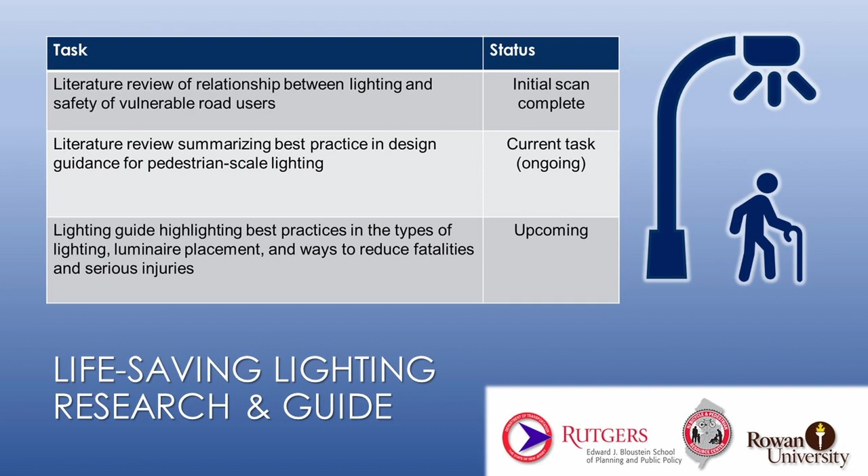We have one more initiative on nighttime visibility. This has been going on for some time, but we're making progress. We have an NJDOT task order to upgrade our traffic signal pole and mast arm details based on 2015 AASHTO standards. The department wants to install backplates with retroreflective tape on traffic signal indications. Our goal is to install backplates on all signal heads, on all steel mast arms, going forward on new construction.

Right now we do it wherever possible on the steel mast arms, but we've made progress. The first draft for steel traffic signal poles with mast arms less than 25 feet has been reviewed and comments provided to the designer. In the future, once the details are complete, NJDOT will require installation of backplates on all signal indications. So that's what I have on this.

But does anybody have any questions about the two initiatives? Go ahead. Most of us get constituent inquiries about things like this, so we're still in the study phase, so we haven't yet determined — do we know when we expect that to be wrapped up?

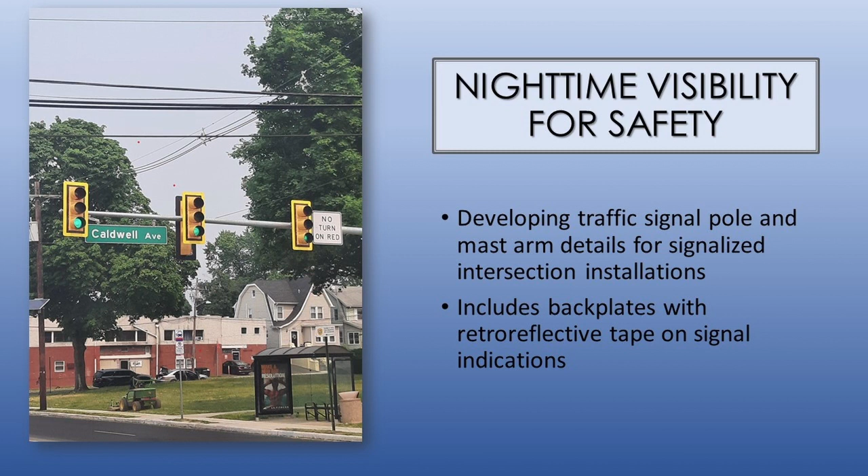So we have 3 pilot projects going on right now in DPM to figure out what it takes for the department to install backplates—whether we have to revise the whole intersection, how costly it is, and where we're gonna go with that. We don't have a program yet, but we have 3 pilot projects and we're gonna see where it takes us.

Yes, Andy? I'm just curious—this is great for what DOT's doing, but is this being extended to the local systems through the grants and local aid? Backplates? Yeah, we encourage backplates on all of our projects. When we get involved as an SMA, one of our comments is always, can we install backplates here?

The locals, we promote it on our HSIP projects when we do application reviews. We feel it's important from a safety perspective, but we understand it's not as easy as people think. You can't just go out there and throw it up. That's why, especially with the new AASHTO standards, it's definitely not as easy as people think.

Or else the department would have done this in 2016 or 2017. It's difficult because it's not just dead load, you've got wind load too. And I think with the new standards, that's what comes into play. You see other states, some of their steel poles are very, very big. Have you ever Googled Florida locations where they have back plates? The new AASHTO standards require deeper foundations and larger diameter poles.

And it is what it is, but we'll continue to do our best at DOT. Any other questions? Okay, thank you, Dan.

Good afternoon everyone, my name is Shivani Patel, and I'll be providing the update on infrastructure preservation innovations. To start with EPIC, since June there has been a lot of activity for this innovation. Special provisions to the NJDOT specifications were drafted for internally cured concrete, and the team members are currently conducting a peer review of the draft provisions.

A candidate list of bridges for internal curing in the bridge deck concrete was compiled. The team is currently working on finalizing the list of candidate bridges with the Division of Project Management.

Team members Samar Rabi and Jess Mendenhall conducted a CPM coordination meeting, which included staff from Project Management, the Program Management Office, Bridge Engineering and Infrastructure Management, Construction and Materials, Regional Construction and Materials, and the Division of Project Management. This meeting introduced the concept of internal curing, addressed questions and concerns, and discussed the implementation plan and next steps.

Team members reached out and communicated with other state agencies for lessons learned and knowledge transfer. The team hopes to continue ongoing communication.

In the next quarter, the team plans to contact and meet with concrete suppliers to gauge readiness for producing internally cured concrete and discuss potential implementation challenges. Team members also plan to begin communications with project designers for the selected projects.

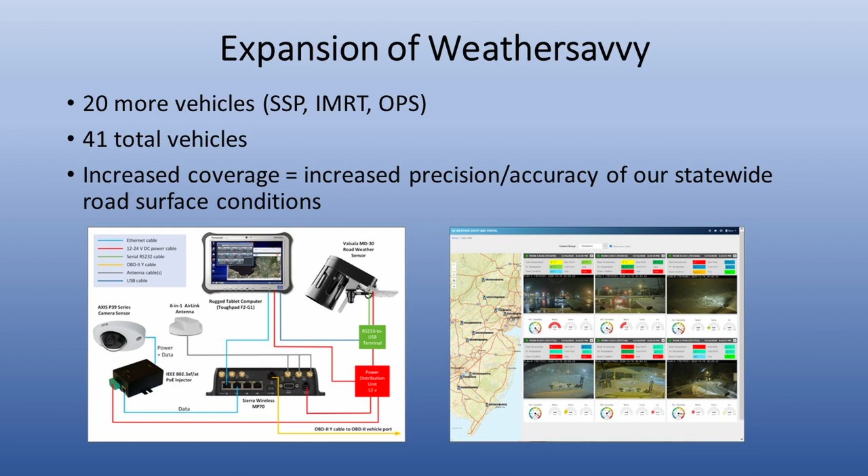Also, we are still in the expansion phase of Weather Savvy. We have a total of 41 vehicles where we're installing Weather Savvy equipment. There is a camera, there is LiDAR, there is a router, and what they do is find out the condition of the roadways, which is very good for the snow. So we are expanding, NJIT is with us. That's what we're doing, so that we have more precision and accuracy for our statewide road surface conditions. That was all from my side.

With the Drivewyze notifications, is it only going to trucks who are currently in the left lane, or is it going to anybody who signed up, every 15 minutes? It is for the truckers, but we really cannot figure out whether they are in the left lane or not. So what's happening is, just for safety reasons, they're getting pings about 4 an hour.

I thought that technology could come where, from the weight of the truck, it can find out whether it's in the left lane or not. But right now what it does is just for safety reasons. And we also observe that if the roadway is not that long, so just from the beginning point, they can send the alert. So we definitely don't want so many alerts going to the truckers because we know they get frustrated. So we're keeping to a bare minimum, like every 15 minutes.

Oh, that's cool. I know that we did a social media post on the TIM training, the online TIM training, to get more people involved, and I believe we are trying to educate our internal comms team about Drivewyze so we can speak about it more educatedly.

And we're encouraging a lot of people to take the online training. Whoever I come across - I used to work for Department of Corrections, I worked there for 13 or 14 years, and I know they are involved in transporting inmates from one prison to another halfway house, so we'll see how it goes. I did reach out to the assistant commissioner there, and I gave her the option that we would be happy to collaborate with them, just so we can get maximum people trained for TIM.

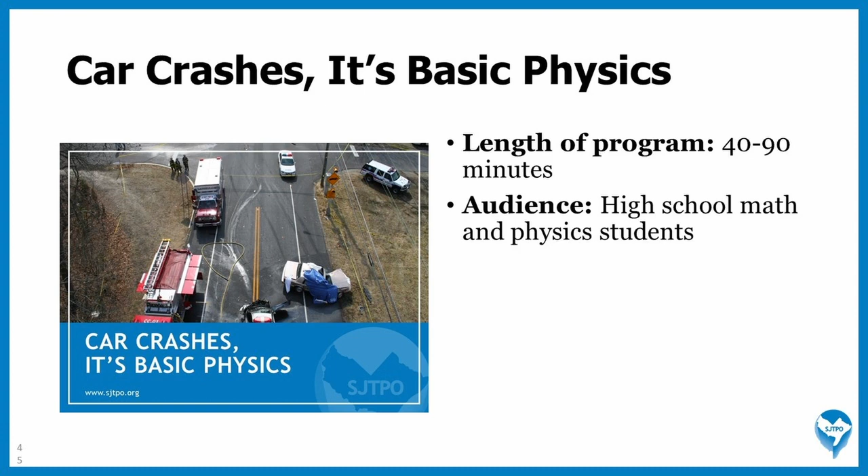I've also taken it now to anatomy, to forensics and anatomy. So we do autopsies. We all know New Jersey's pedestrians, we're pretty high in pedestrians. I worked in Atlantic City, let me tell you, I got a lot of expertise with pedestrians getting hit. I've had pedestrians get hit in wheelchairs, regular, high speed. I've gone to scenes and you actually say, oh my God, there's shoes, the foot's still in there. Okay, let's leave that. When those pedestrians get hit, they don't fare too well. So we do a lot with pedestrians.

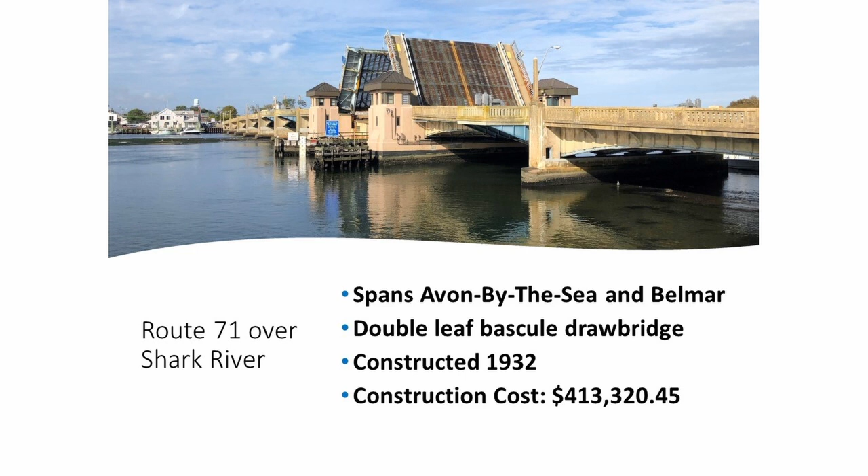So just a little bit of background. That is the bridge right there, Route 71 over the Shark River. It is a double leaf bascule drawbridge. For those that don't know what a leaf is, it's the part of the bridge that raises, so there are 2 on this bridge, the double leaf bridge. It spans the Shark River between Avon by the Sea and Belmar. Constructed in 1932 at a cost of $413,000. It's also our most beautiful bridge, awarded the 1933 Most Beautiful Bridge Award by the American Institute of Steel Construction. It's also historic, listed on the National Register of Historic Places.

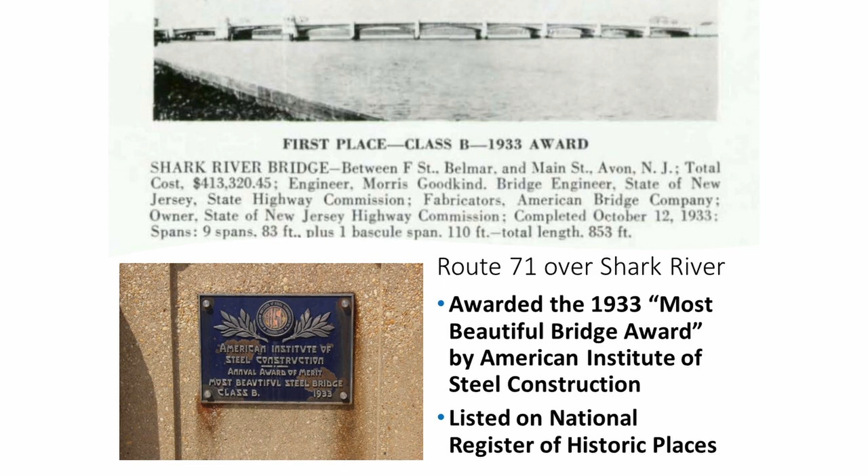It's our busiest drawbridge. It has over 5,000 openings for marine traffic annually. It's one of two DOT drawbridges that staff 24/7. Seasonal vehicular traffic, as you can imagine, down the shore, but year-round, we see heavy pedestrian and bicycle traffic over this bridge.

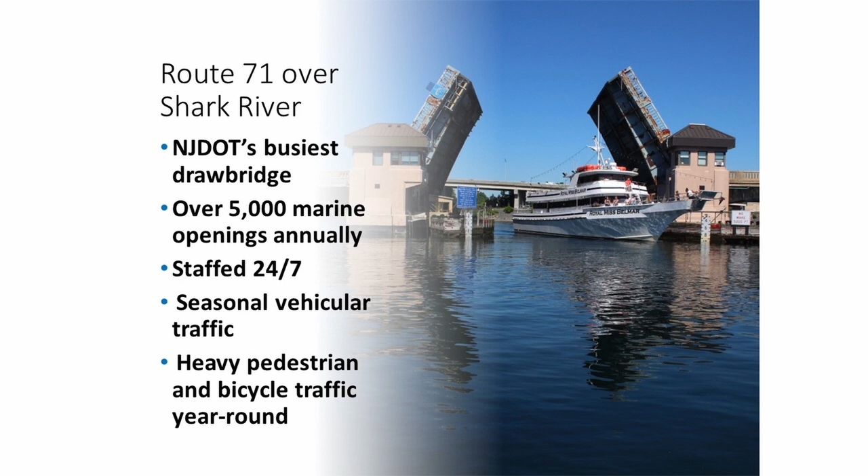So just a little bit of geographic information here. It's the second of 4 bridges from the Atlantic Ocean. We have Ocean Avenue over here, then you get to Route 71, then New Jersey Transit, and then Route 35. So Route 71 offers 13 feet of clearance in the closed position. Ocean Avenue has 15 feet closed, New Jersey Transit is 8 foot closed, and then Route 35 is 50 feet fixed since 2004. So anything going through Route 71 has to be less than 50 feet tall.

Excuse me, could you go back there a second and do that again? Which bridges are which? Ocean Avenue, that's Monmouth County. 71, that's ours. New Jersey Transit, and then Route 35, which is ours, DOTs. I'm just looking at the clearance heights and they're vastly different. They're all over. Route 35 was a twin of 71 until it came down in 2004, so it's 50 foot fixed. Anything going under there has to be less than 50 feet.

Okay, thank you. Just a little bit of background, so you know where we are and what we're talking about. So the safety features, this will get to be important later in the presentation, but it has a myriad of safety features on this bridge to prevent malfunctions: bridge traffic signals, preempted traffic signals at the adjacent intersection, warning gongs, warning gates, barrier gates, and span locks.

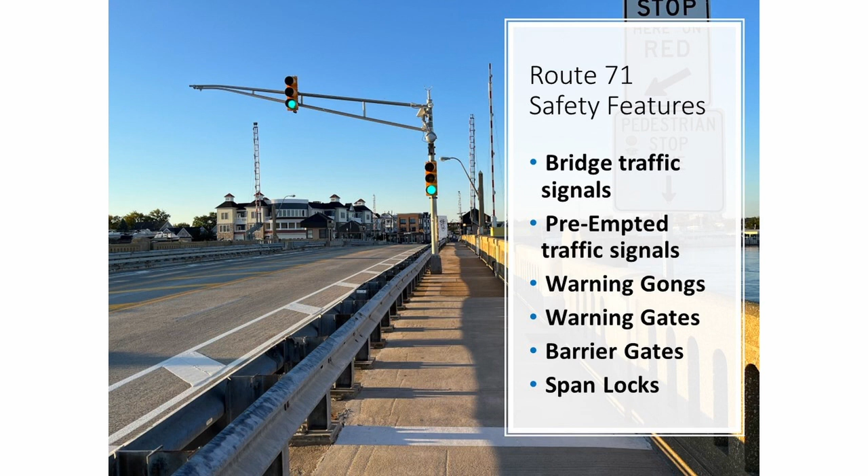So just to go through what each one of them are, the warning gates, they come down just as the light turns red to alert drivers that the bridge is going up. Then the barrier gates, they're those big beefy barrier gates behind the warning gate. They come down, and when they lock into place, they physically prevent a car from going into the open drawbridge. And then the span locks, they're kind of like a deadbolt on your door. When the bridge is in the fully closed position, the span locks will engage, keeping the bridge locked into position, keeping it from bouncing, keeping it from opening unexpectedly. So they all work in unison with each other. We go through testing to make sure that everything's working and everything's working in sequence.

So just to show you where everything is, the green squares are the bridge traffic signals and the warning gongs. The yellow is the warning gates. The red are the barrier gates, which form a physical barrier when the bridge is going up. And then the blue are the span locks. So the span locks are kind of the whole topic of discussion as to why we did what we did out here.

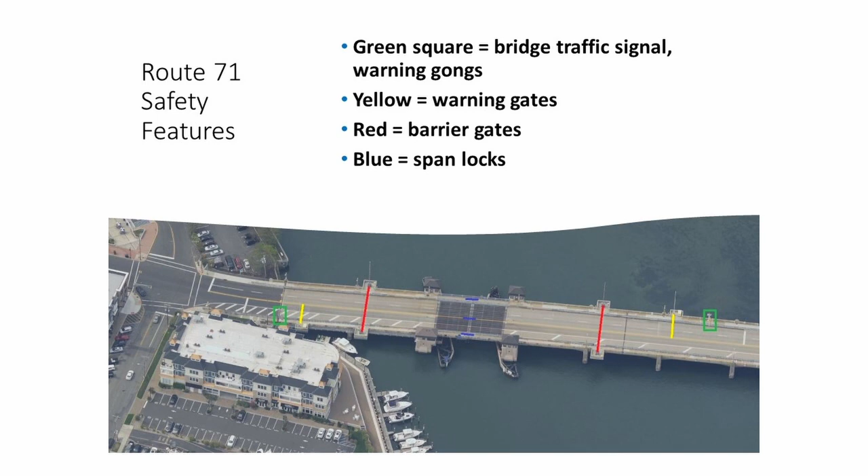So for those that don't know how a drawbridge operates, this is the opening sequence. The Marine call will come into the bridge house via radio or telephone. The operator monitors all his cameras, turns the traffic signals to red when it's safe to do so, when there's no traffic, no pedestrians. That activates the flashing lights and the warning gongs.

Then the operator ensures that all traffic is stopped and clear of the gates, because there's always people running the gates, always pedestrians trying to run the gates. He'll lower the warning gates, then the barrier gates. The oncoming gates come down first, then the offgoing come down second.

Then the span locks are disengaged. Then there's an air horn on the bridge, sounded 2 long blasts, and then the bridge is raised. And then when the boat is safely through the bridge, we do it all in reverse.

The vessel captain notifies the bridge house that the vessel is clear of the bridge. The operator ensures that marine traffic is clear of the bridge. Then that same horn is sounded 5 short blasts. The bridge goes down, the span locks are engaged, the barrier gates are raised in the opposite direction, offgoing first, then the oncoming gates. The warning gates go up, the operator turns the traffic signals to green, and then he gets in his house and just hides as everybody goes for a big free-for-all.

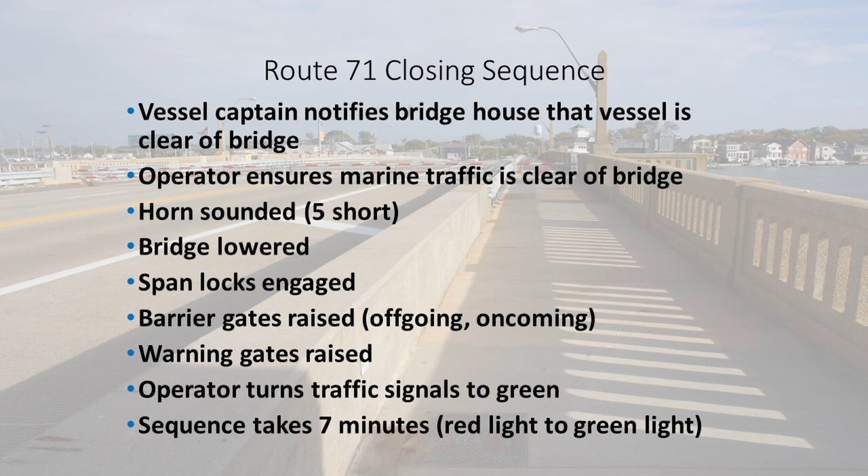It takes 7 minutes from red light to green light. So as soon as that light turns red for the call, if you're the first car there, it's 7 minutes from red light until that light turns green again.

So September 22nd, 2021, we had a failure of one of our span locks. Like I mentioned earlier, we have 3 span locks for safe operation of the bridge. The center span lock failed during the 3rd lift of the morning. Weather conditions were the same as today, partly cloudy, 70 degrees. There was no adverse weather conditions, and we had no previous significant events with the span locks.

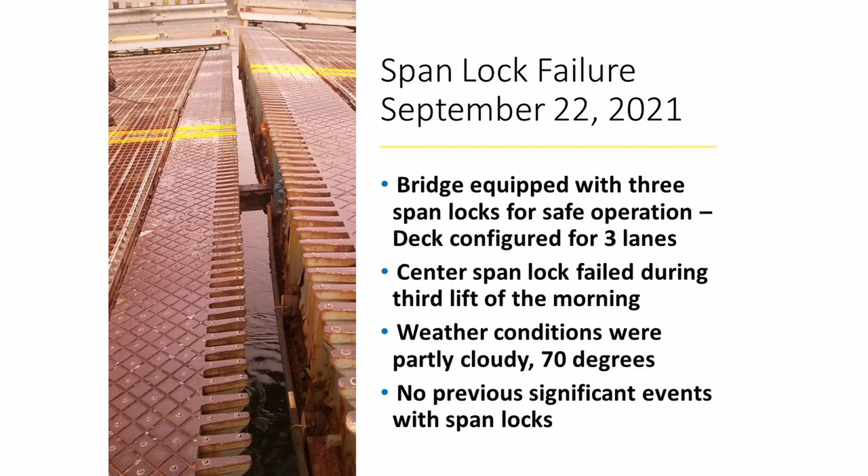So what had happened was when the bridge was raised, that center span lock, like a deadbolt on your door, just engaged itself. There were no indications that anything was wrong in the operator's booth, and the operator initiated his closing sequence as usual, not knowing anything was wrong. So as the bridge was coming down, you can see the span lock was engaged. The two leaves kind of crashed into each other, and the span lock hit the other leaf and damaged the structural steel. So the bridge had wedged itself shut.

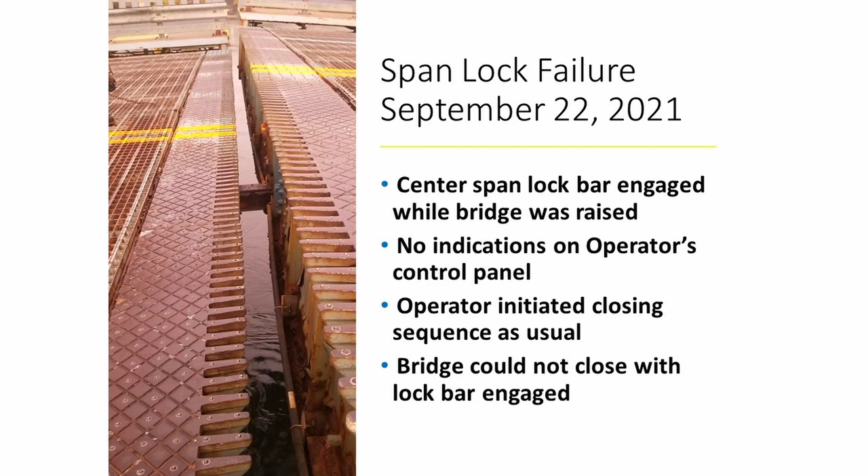We couldn't get it open. We couldn't get it closed.

Just some more pictures of the damage out there. The lock bar was extended on the far side, and then you can see the damage where they hit the steel and the receiver socket.

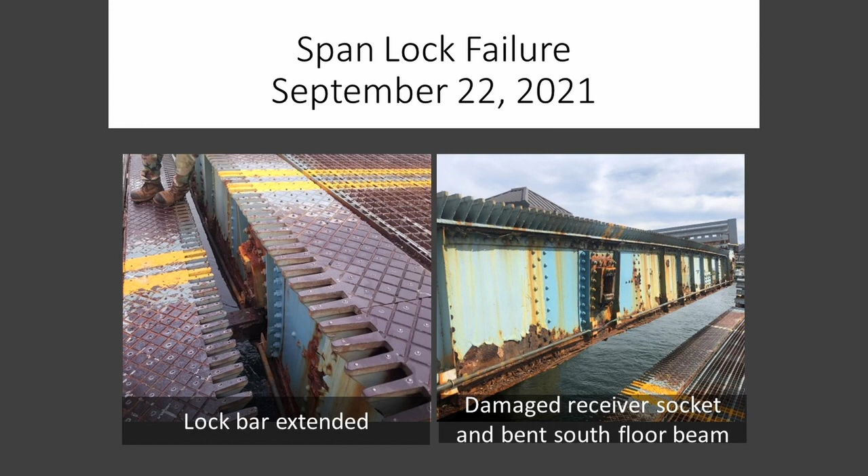So even if we did get this back into position, there was no way that we could reuse any of the existing machinery. Some damage from the underside, some of the bent steel, and then you can see in this picture just some of the damage.

We also had 2 boats out at sea that had to be notified the bridge was inoperable and they couldn't come back in until we had it fixed. And then we sent out our movable bridge engineering team and our WSP consultant out to the site.

So in response, our on-call contractor was on the scene, and we immediately determined that the center span lock was just not reusable. That hardware was cut out so we could lower the bridge. And then we were able to bypass all the electric feeding that span lock, and that allowed us to at least raise the bridge to remove all the damaged components.

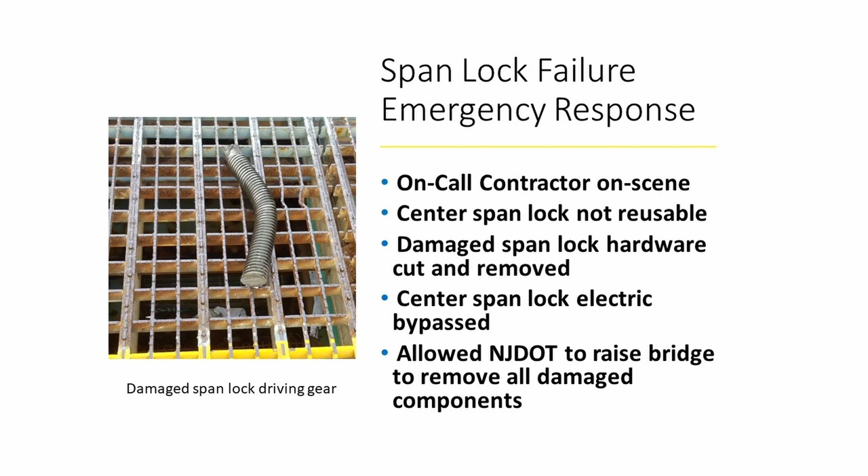We were also able to get those boats that were at sea back into port. Our movable bridge engineering group and DOT's on-call contractor were on scene. The operator's panel had to be reconfigured that day to allow operation with the remaining 2 span locks, because we have an interlock procedure that wouldn't allow us to do anything until all of that was bypassed. The programming was revised to prevent a similar malfunction on the bridge, so we put in a couple more checks and balances. Should that engage, at least we would get some kind of indication on the board.

So the bridge was able to be reopened to marine traffic the same day, and like I mentioned, we were able to get those boats at sea at least back in. We left the bridge open in the raised position. It was open to marine traffic, closed to roadway traffic. It kind of looked like an abandoned drawbridge, like you see on the railroads. We left it like that overnight until we could come back out the next day and further evaluate and see what we can do.

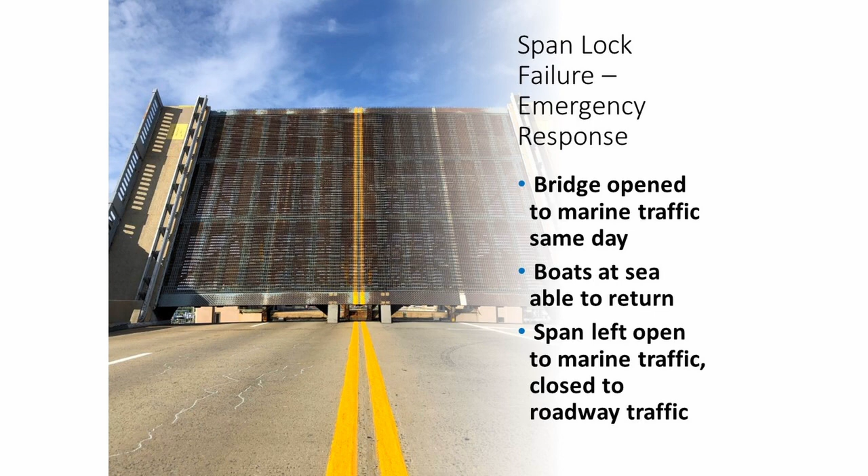So the cause of the failure was a failed proximity switch. Those activate kind of like a laser. When the laser lines up, it gives the indication that the bridge is in the proper position, and that'll allow the span lock to engage. For whatever reason, that laser gave an indication while the bridge was raised, and it engaged the lock without giving us the indication on the board. So it was just a failed switch, just a small piece of machinery that caused this major failure.

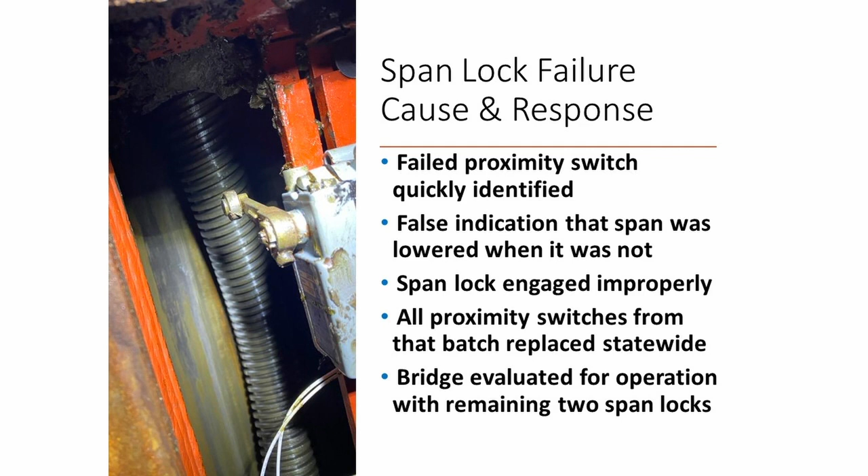All the proximity switches from that batch that we had installed, we made sure we went back around to the bridges and removed them and replaced them with another batch. And we were able to evaluate the bridge for operation with the remaining 2 span locks. Like I mentioned, we had 3 - the center one was damaged, but we still had the 2 on the outside underneath the 2 curb lines.

But almost immediately we had pressure from the towns. Same day - how soon can you get it back open? This time of year, the shore towns are trying to get people down there after Labor Day. It's the shoulder season. A couple days later, 3 days later, we were able to at least open that bridge to 1 lane in each direction. So you can see in the picture we had that center lane closed, and we were able to get traffic away from that damaged center section of the steel. We had that outside right lane going southbound, and the other lane going northbound.

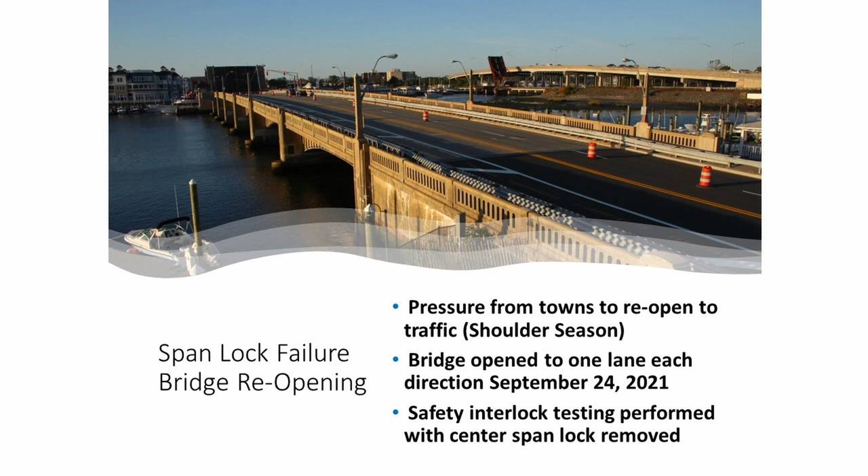But we knew that that wasn't going to hold up, so we needed a plan for the remaining life of the bridge. The bridge is programmed for replacement in the near future - at least the next 10 years we're looking at replacing it with another drawbridge. So we studied 3 options. Option 1 was just leave the bridge in its current condition. Option 2 was to replace that center span lock and restore everything back to its pre-failure condition. And option 3 was a road diet across the structure.

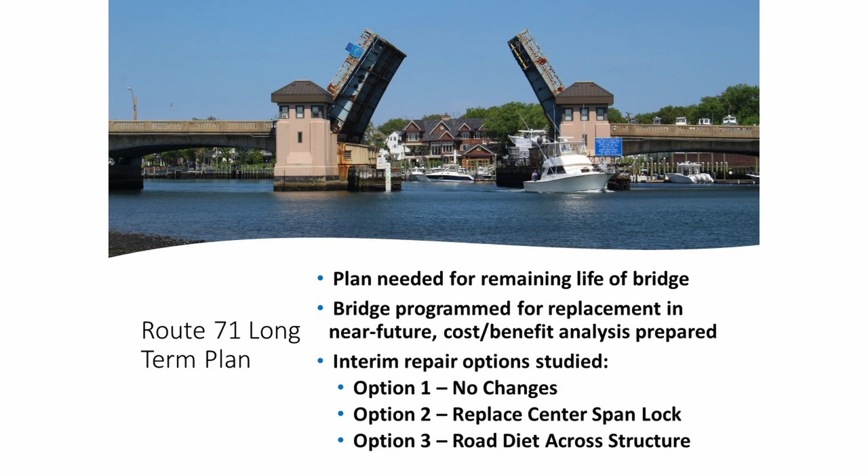So I'll go through this real quick. Option one was just to maintain the structure in the existing condition. That would have left all that damaged steel and opened it back up to 3 lanes. It was the lowest upfront cost. It would have kept the bridge open to traffic, but it would have advanced deterioration of the machinery, and caused premature and uneven wearing of the machinery. Any failure with the bridge in that condition would have caused an imminent closure, and we wouldn't know how long it would be.

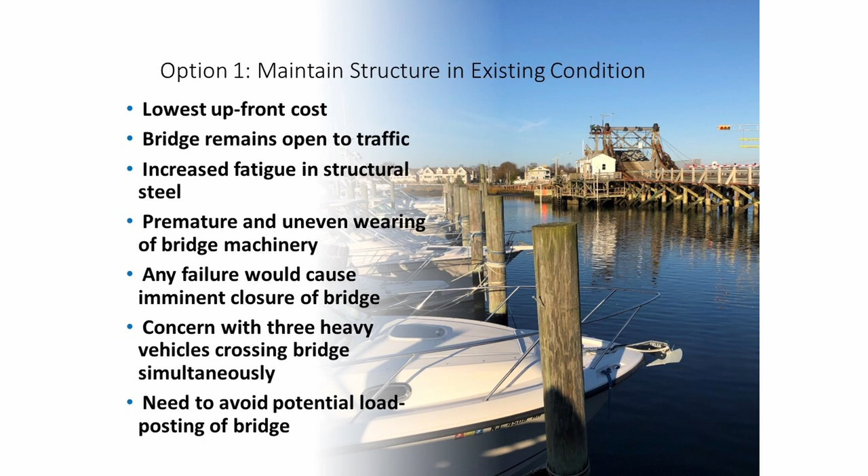There was concern with 3 heavy vehicles crossing the bridge simultaneously - tractor trailers, landscape trucks, dump trucks - so there was a concern that there could be 3 heavy trucks crossing the bridge at the same time. And then we didn't want to load post the bridge, given that it's a state highway. In this picture here, this is Brielle Road over the Glimmerglass in Manasquan. That bridge has a 3-ton weight limit, so Manasquan can't even get fire trucks over this bridge from one side to the other - they have to go all around town. The locals fight it when you try to replace it or talk about replacement. We didn't want to get into a situation like this where you have a 3-ton weight limit, or any kind of weight limit, on a state highway.

So option 2 was to restore the structure to the pre-failure condition. This was the highest option. Repairs began at $3.5 million. It was during COVID, and there were a lot of production delays at the time. It was very complex, requiring a lot of electrical design and a lot of steel repairs.

The biggest thing was extended roadway and sidewalk closures. We were looking at a minimum of 6 months, extended marine outages. There's a very big commercial fishing industry out here, and we didn't want to close that bridge. We couldn't close it to them because that would have cut off their livelihood.

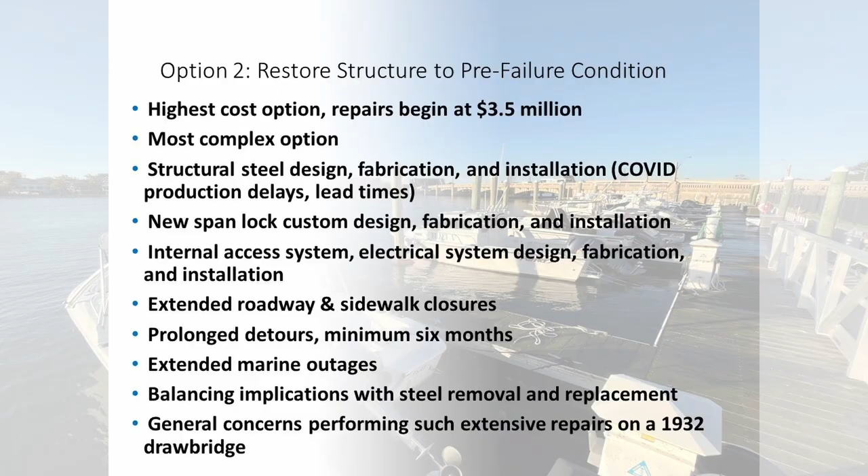There were some balancing implications with steel removal, and we just had general concerns about performing such repairs on a 1932 drawbridge. It's 90 years old. We didn't really want to get into something like this on a structure that's going to be coming down in the near future. So option 3 - this is obviously what we went with - this was the road diet.

This reduced the roadway to 1 lane in each direction. It was a low-cost solution we were able to quickly implement, properly balancing the traffic load away from that damaged steel. There was no live load where that damaged steel was, where the center span lock had been, and we were able to preserve the remaining lifespan of the structure. We're anticipating that this road diet will get us into replacement, and we won't have to do any major repairs to the bridge.

And then given that we had a 50-foot wide deck, that gave the option for bicycle traffic and some other safety improvements that I'll get into.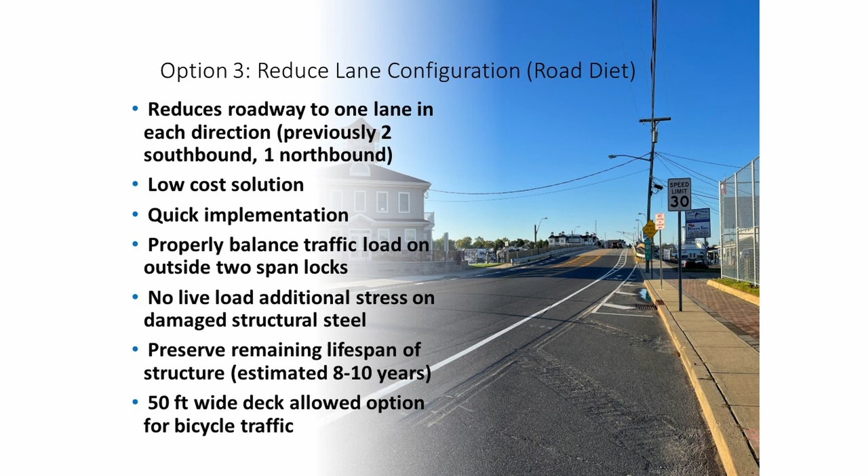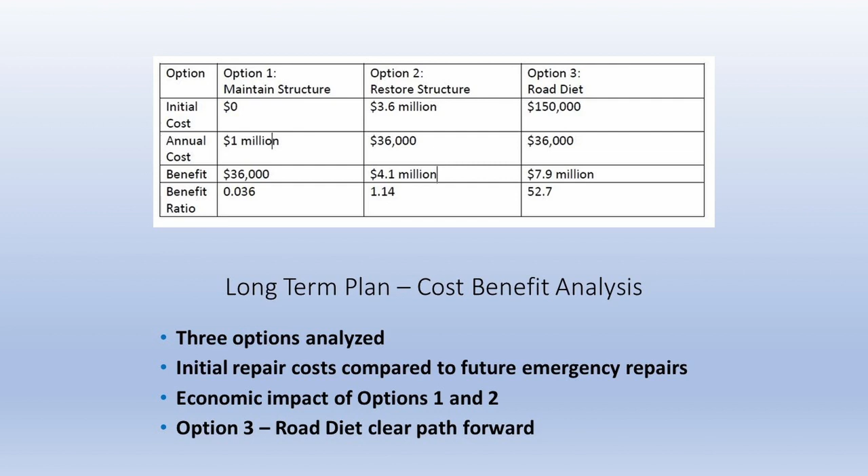So just looking at the cost benefit analysis here, option 3 with the road diet was just a very clear path forward.

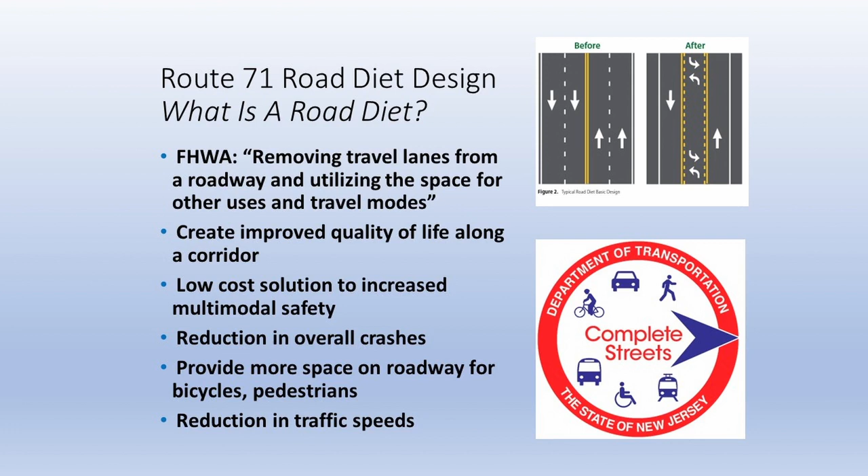So what is a road diet? FHWA says that it's removing a travel lane from a roadway and utilizing the space for other uses and travel modes. It creates improved quality of life along a corridor. It's a low-cost solution to increase multimodal safety, a reduction in overall crashes, and it provides more space on the roadway for bicycles and pedestrians, plus an overall reduction in traffic speeds.

So historically, Route 71 was a major highway. It was a 4-lane highway with a double yellow and limited parking. In 2004, that all changed when we constructed the Route 35 fixed span. Route 35 became our arterial, and then Route 71 became kind of the local road.

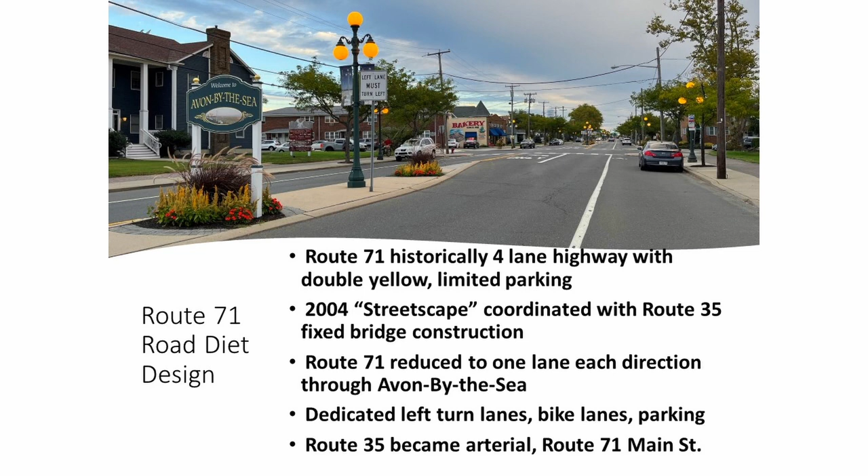So Avon by the Sea was one of the first towns along Route 71 to do this. It was called the Streetscape in 2004, and they reduced the road to 1 lane in each direction, as you can see here. There are nice islands, plantings, left turn lanes, and parking. But that's an old picture.

If you ever want to go down a rabbit hole, historicaerials.com is a great site for looking at old satellite images. That's an old satellite image of Route 71 - you can see the double yellow and then the 2 lanes in each direction.

But when the Streetscape project was done, Route 71 over Shark River was kind of neglected. The northbound right lane across the bridge was converted to a shoulder. On the southbound side, there was a short 1,200-foot 2-lane section across the bridge, and we noticed very aggressive driving across the bridge.

You'd get people that didn't know it was a 2-lane section, and you'd get people passing them on the right. There were backups from left-turning vehicles on the southbound side when you get into 5th Avenue in Belmar. There were bicycles riding in the right lanes. It was just kind of an accident waiting to happen, and it created an overall disconnect between both towns.

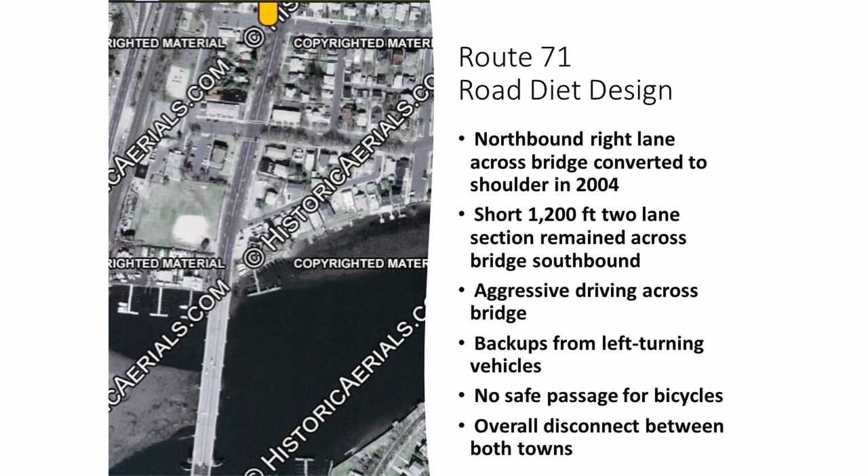So given that we were going to go forward with the road diet, we had the 50-foot roadway width, and it allowed for bicycle facilities. So we wanted to include that in the project.

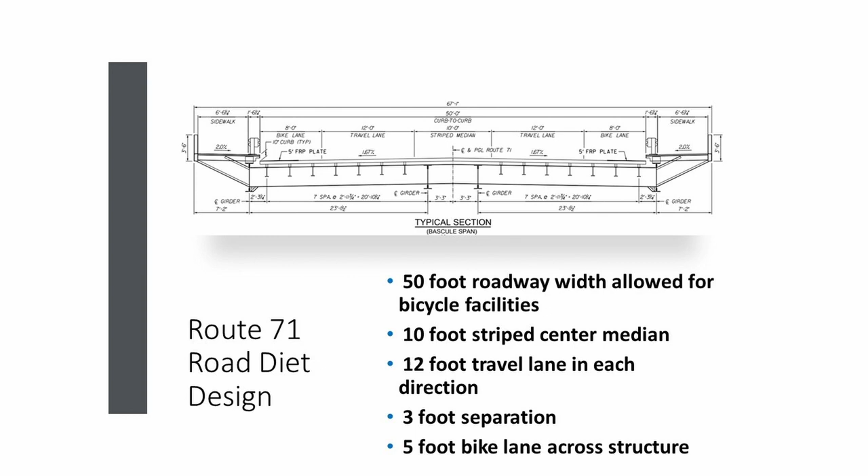We had to include a 10-foot striped center median to get traffic away from that damaged steel. We kept a 12-foot lane in each direction, a 3-foot separation between the lane and the bicycle lane, and a 5-foot bike lane in both directions across the bridge.

And then when we get into Belmar, the bicycle lanes were extended across the bridge from Avon by the Sea into Belmar, eliminating a rather dangerous merge in downtown Belmar where that southbound 2-lane section merged back into one. We were able to put in a dedicated left turn lane at Route 71 southbound and 5th Avenue, and we were able to add additional parallel parking spots in Avon by the Sea.

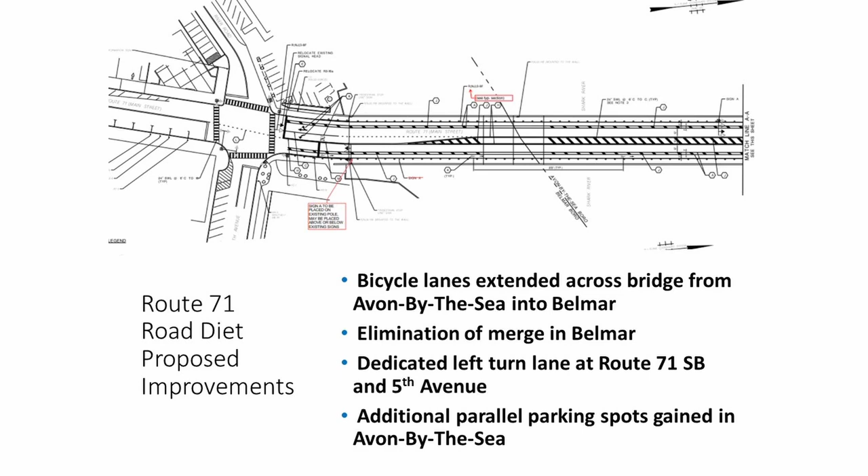So for the bicycle lane across the bridge, we used a first of its kind in New Jersey: a fiberglass reinforced polymer plate across the steel grid bascule span. Chicago uses them, on the Dearborn Street bridge over the Chicago River. You can see how Chicago uses it. We adapted it and put it onto the Route 71 bridge, first of its kind here. It was lightweight, so it wouldn't really affect the span balance.

Then we took our plan to the front office and wanted to pitch it to the towns. But as I mentioned earlier, there was significant internal coordination within DOT. Not only was it a drawbridge project, we had to get our regional operations folks involved, structural engineering was involved, traffic engineering was involved, our sign shop had to make up all the signs, and the Office of Government and Community Relations, they were great, they had to deal with all the towns and let them know what was going on.

We presented it to Avon by the Sea and Belmar. Belmar easily accepted it, no problem, whatever we wanted to do out there. It was Avon by the Sea that gave us some trouble. They fought, they sent letters from senators and congressmen. The team was really ready to turn back after seeing how much opposition Avon was giving us.

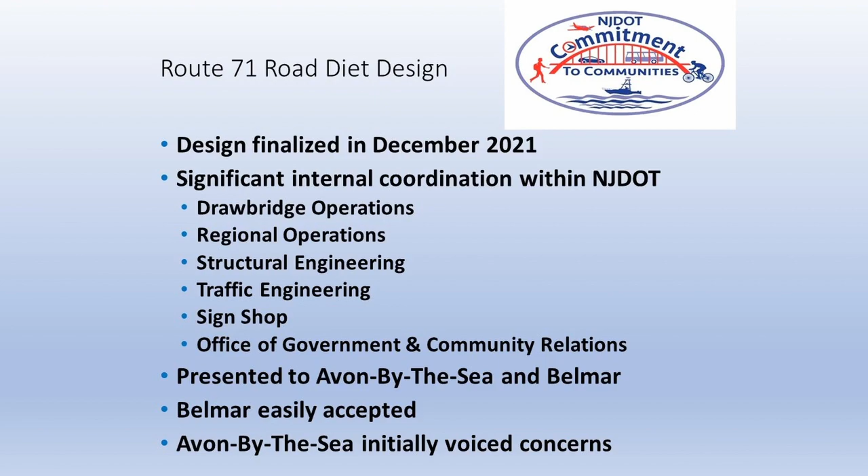So we had a meeting with Avon by the Sea, and that's where this comes into play: this little toy drawbridge that I had when I was a kid. We brought it with us, and this was what kind of won the war. It's really just a drawbridge in its simplest form. Given this, we were able to show the higher-ups in Avon why we were doing what we were doing, the cause of the failure. We had a real fancy PowerPoint, but it was really this that they latched onto.

Just showing them in almost children's terms how a drawbridge operates and why we needed to do what we needed to do. So this was a Micro Machines drawbridge from when I was a kid. And it's actually the second time in recorded history that Micro Machines have saved the day. The first, of course, being in...

1990. So we had the meeting with Avon by the Sea, and after we showed them everything and explained what we needed to do, they had a couple requests for extra work to be included in the project. They were really simple requests, and I'll just show you some pictures of what they requested. We were able to accommodate every request that they presented to us.

So then they agreed upon the road diet, and we were able to move forward with it. Their extra work requests were high visibility hatching at all the crosswalks through town, and they wanted a left turn arrow at Route 71 and 5th Avenue. They were concerned about backups into Belmar.

Enhanced guide signs on Route 35, Memorial Drive, and Sylvania Avenue. They actually did not want Avon to be a control city on all the guide signs. They said they were getting a lot of Belmar traffic cutting through Avon, getting to Avon thinking they were in Belmar. So they wanted Avon removed as a control city on the guide signs. It's like, fine, so we made everything into Belmar.

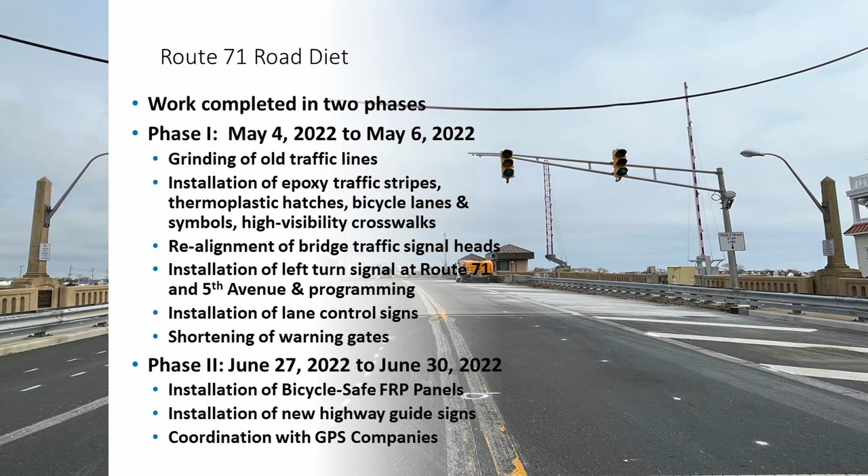We had to install those new green signs that Avon wanted, and then the coordination with the GPS companies was complete. So all told, about 2 months of work. It was all done before July 4th of 2022. We wanted to get it done before Memorial Day, but that just didn't happen. Still, we were able to get it done before July 4th of last year.

So the rest, I promise, is all pictures. That's what it looked like before we began any of the work.

The grinding, getting preliminary striping, and then the completed projects. So that was the hatching that they wanted. We were able to do 18 intersections between both Avon and Belmar, just high visibility striping at all those intersections.

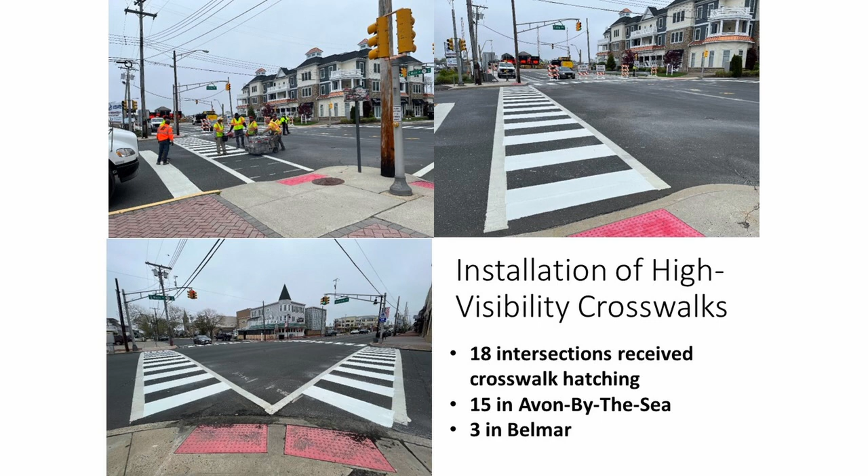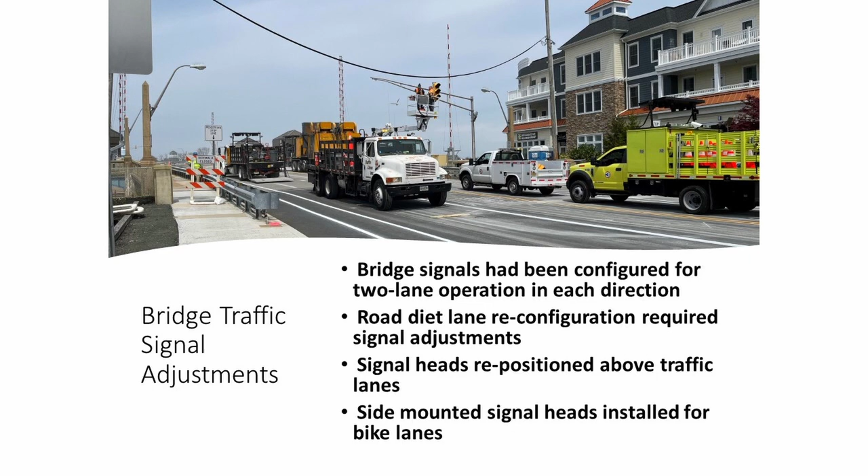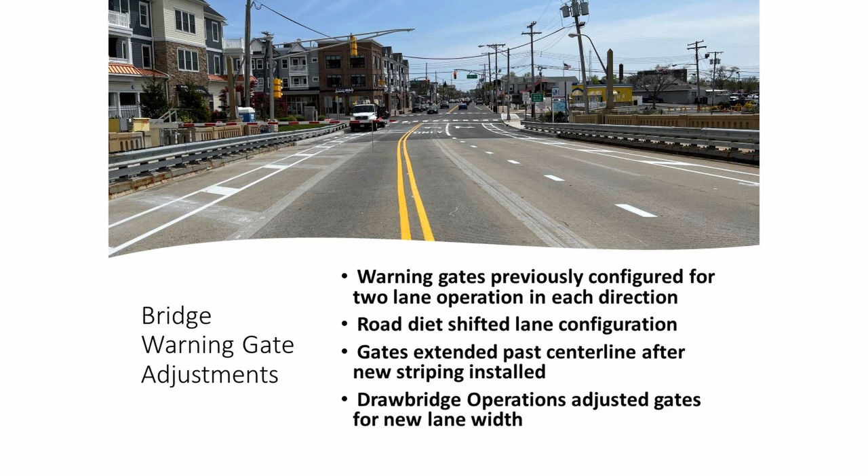That's that dedicated left turn lane. It has an 8-vehicle queuing capacity. And we were able to adjust our gate lengths and gate widths just so that it adheres to the new roadway configuration.

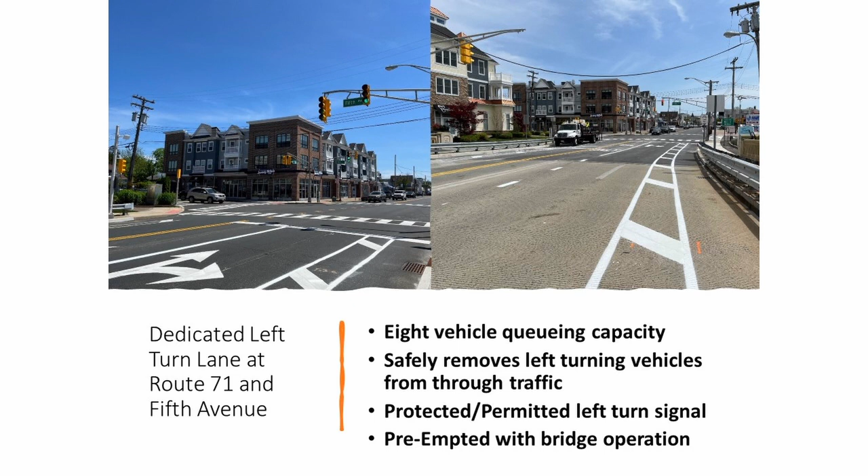Oh, there it is again, the dedicated left turn lane. We have a protected permitted signal at that intersection, and it's also preempted with bridge operation. So when the bridge is up, 5th Avenue will go on forever and Route 71 is stopped.

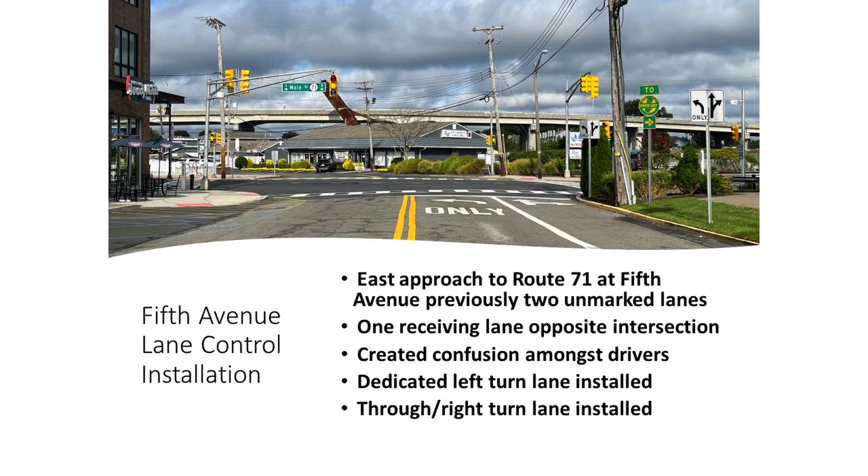We were able to clean up a little bit of odds and ends in Belmar. Also, this is also the 5th Avenue intersection. This was a 2-lane approach with a 1-lane receiving, or just 1 receiving lane on the other side. We were able to put in a dedicated left turn lane here and a through-right lane just to clean that up to avoid any kind of confusion.

And there it is. There's the bike lane going over the bridge and the new panels that we put on there.

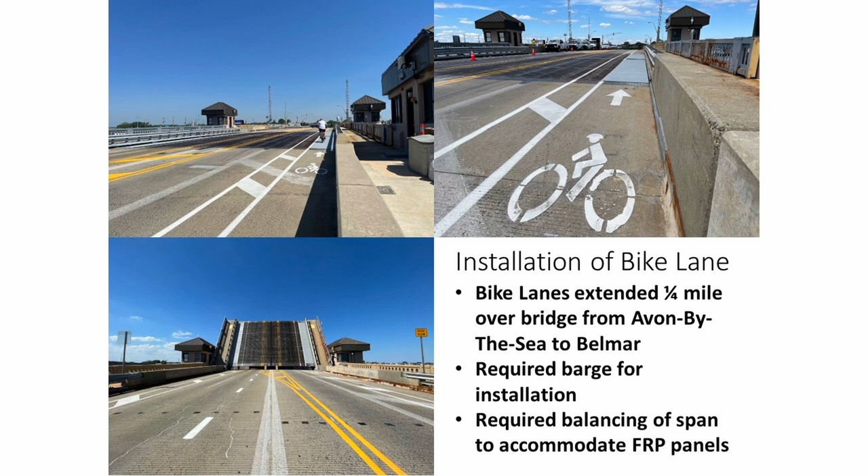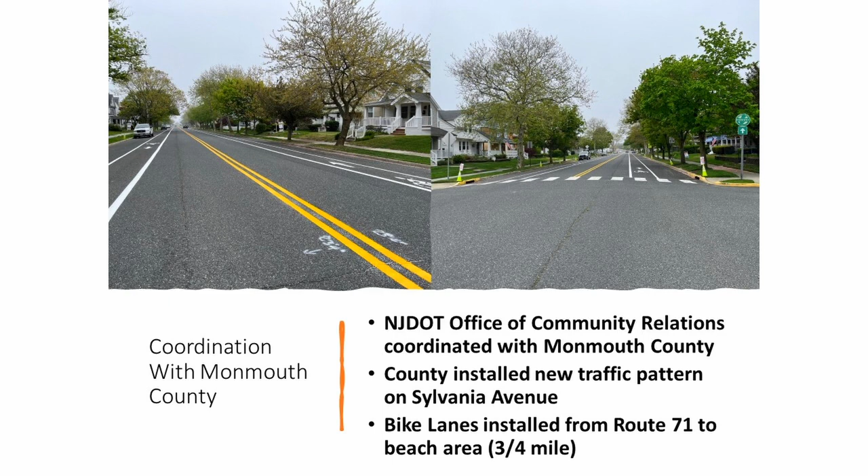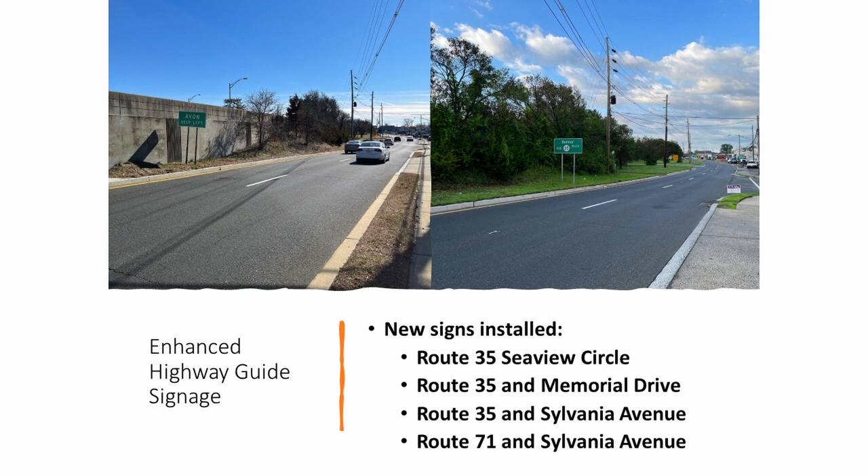And then these were the signs that Avon wanted installed. On the left, you could see the old sign that said Avon keep left. They didn't want that, so we changed it to Belmar use 35 south. And then all of the control cities were changed to Belmar. We got rid of Avon anywhere we could, just so that Belmar traffic would keep going to Belmar.

And then, like I mentioned earlier, we coordinated with all the GPS companies. Mobility was able to change the algorithms just so that people going into Belmar were directed onto the state highway system, ideally Route 35, but if they had gotten onto Route 71, then to stay on 71 instead of using local roads. That's just what we did with the crosswalks. The X's are the crosswalks, the green are the new signs that we had put in, and then our drawbridge is right in the middle of it all.

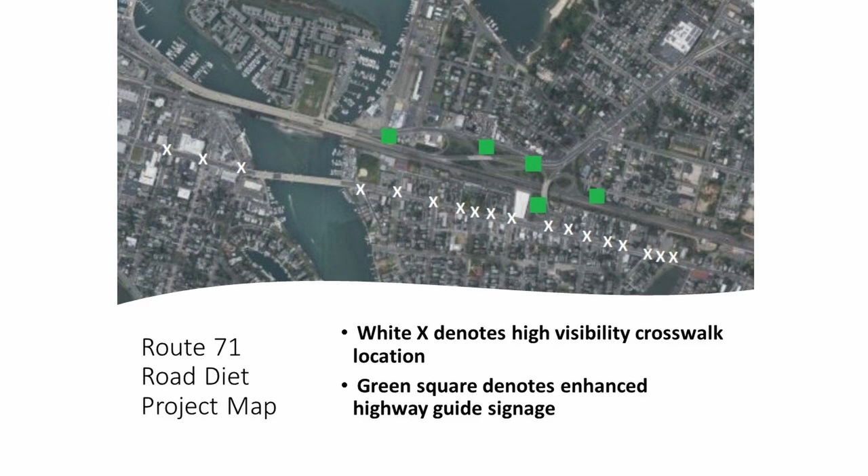And then there was another video that went out when the project was complete. Again, I can send you the link for that.

And the whole total cost was $150,000, so it cost us pretty much nothing. We were able to turn that negative out there into a real positive. What we're seeing is that the people are loving it, the pedestrians, the bicyclists. We continue to monitor the highway, make sure everything's moving smoothly with that road diet, but what we're seeing is that the road is operating better now than it ever did, even during our busiest lifts at 2:30 p.m.

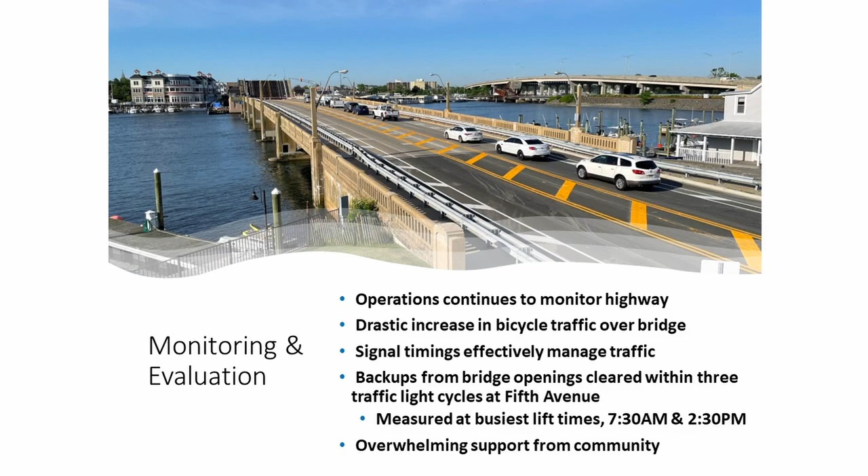And we've had overwhelming support from the community after this went in. People love the bicycle lanes out there. We're seeing a drastic increase in bicycle traffic across the bridge, people are using it. So it was born out of necessity, but it turned into a real positive. It did win 3 awards.

The AASHTO Operations Excellence Award for 2023, small project category, the FHWA Build a Better Mousetrap 2023 Bold Steps category, and the New Jersey Society of Professional Engineers Public Project of the Year, 2nd place.

Looking forward, we're going to continue to monitor traffic flows, bicycle trends, and bridge operation. We want to evaluate those FRP plates through a winter season. We weren't able to do that last year with no snow, but we're confident that if Chicago can use them, so can we. It's proof that drawbridges and bicycle lanes can coexist. In the past it was kind of like, oh, you have a drawbridge, you're not running a bike lane across that, but we were able to prove that they can coexist.

This is Route 35 over the Manasquan River. This is another one that we're looking at doing. There's a lot of bicycle traffic across this bridge, so ideally we'd like to put bike lanes on this one as well. So we're looking at future uses of FRP plates and drawbridge applications. And that's it.

Does anyone have any questions for Gerald? Sure, so for the coordination with the GPS companies, right? And to talk about Go. Say it again, are you talking about Google? Google, Waze, like, yeah, the big ones.